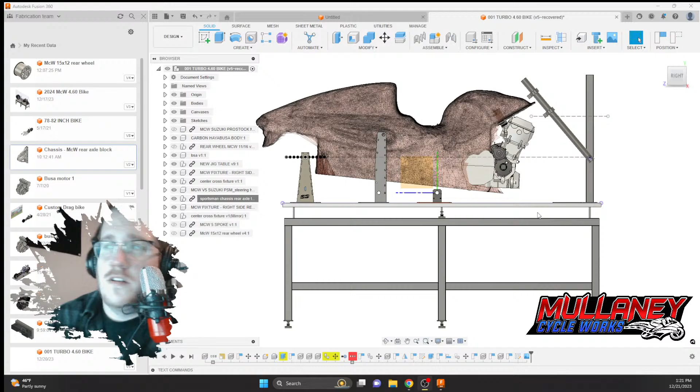All right, so this is just our base setup. Right now what you guys see is the 3D scanned body I have here in the shop. I was able to import it into Fusion, and now I can build a bike around it, make sure I have the right widths.

I don't want to make the chassis too wide because then the body simply won't fit. I don't want to have a tube sticking out of the body. I bet a lot of people that see this will think this process is a complete waste of time, but I don't think so, because I'm not cool with wasting material or time.

So let's just get started. We're going to do the back half, that's kind of the only thing I'm worried about right now. We've got a front wheel up in there, a steering neck fixture, my lower center cross member, my rear cross member fixtures, and also my rear axle fixture block.

These reference lines with all the black dots are just axle wheelbase length references. So this one's 70 inches and this one's 80 inches.

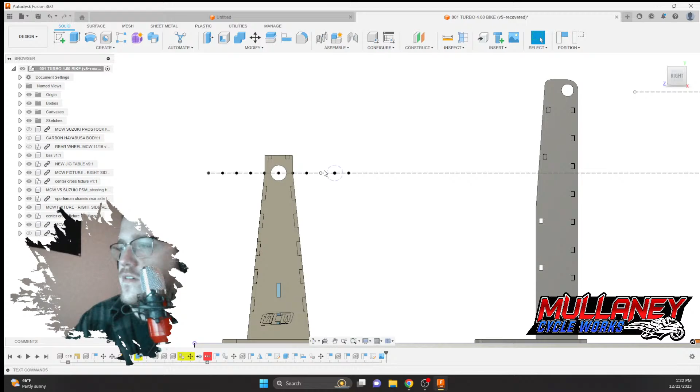So I guess first things first, we've got to think of the width of this chassis. Pro stock chassis is typically 17, 17 and a quarter inches. This chassis, I think I'm going to make it 18 inches, a little wider, just because the option for rear wheels in the 4.60 class is broader.

Some guys like to stretch out the 10.5 inch slick with an 11-inch rim, and I just want to be able to create a package that works with a lot of the products and components that are already out there.

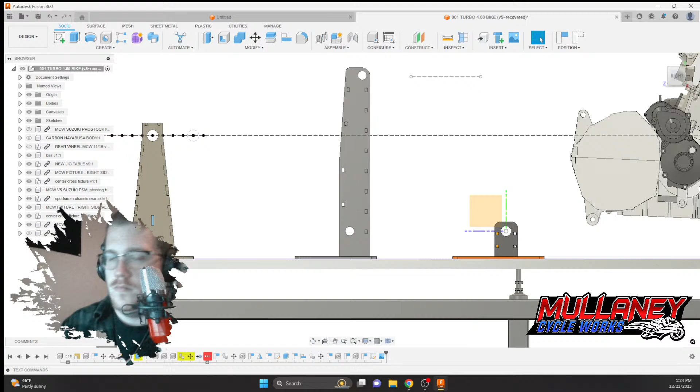All right, sorry, let's build a drag bike. So we're going to build this bike, I believe right now we're going to do a 75-inch bike, just on account of the body works that are available. I think I can squeeze a 75-inch bike underneath this Hayabusa body. Gonna be tight, and even if we have to favor the body back an inch or two, I'm not too worried about that.

We've got a lot of stuff to fit in the front half because this bike's going to be turboed, so we'll worry about that when we get into the front half in future videos here.

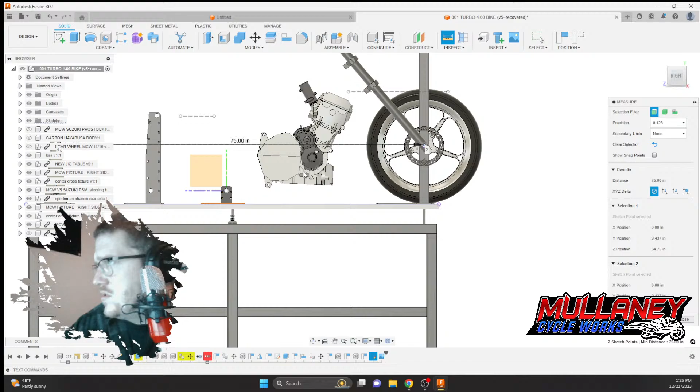So quick little dimension check real quick. So this dot to that dot is 75. Cool, I dig that.

We're going to use that spot because the axle blocks I plan on using, I was going to do some steel fixed axle blocks, but I've decided I'm going to make these nice aluminum axle blocks in case we want to stretch the bike out in the future. We can make new axle blocks and just stretch it out 2, 3, 4 inches or so.

So first things first, start sketch, capture position. Right here, this is our lower main center tube. It's going to be 1.125.

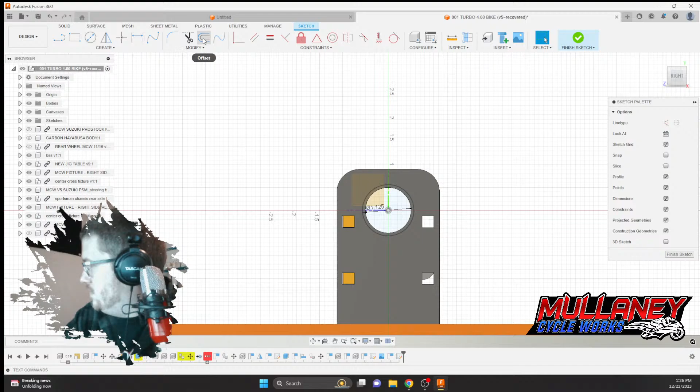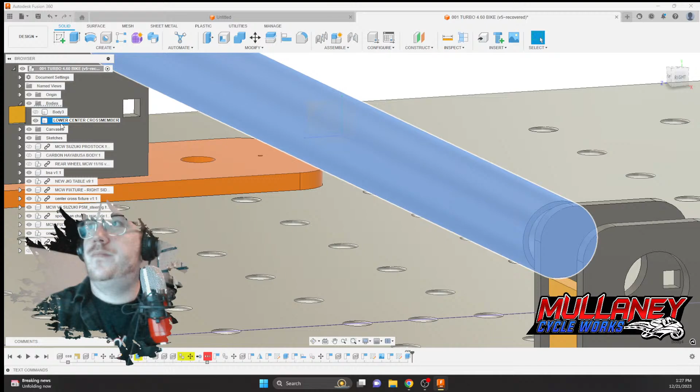Lower center cross member. And then we're going to do an offset plane from this edge right here, and we're going to do some math real quick.

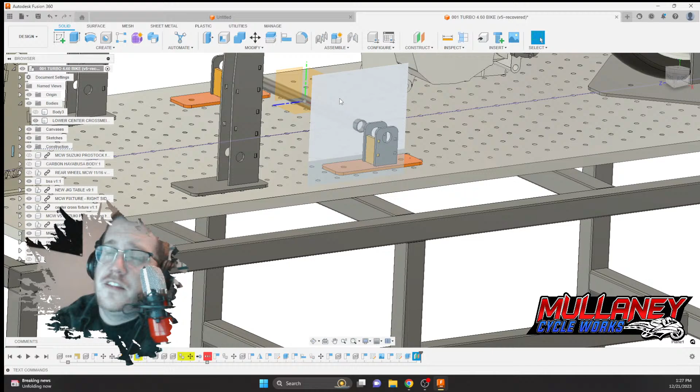1.125 divided by 2 is 0.5625, plus 0.065. So we'll move this in right there. So what this plane is right here, that's a construction plane. Now I could click on that surface and actually use it to sketch on. This is representing the center of the 1-1/8 inch tube that would be on the outside of the chassis, but I also move it in 60 thou or so to have a little bit of room for welding.

One thing I want to do here is import the axle blocks. So we go into our file, into our library here of saved parts. All these parts here I've made and designed and whatnot. Click on here — what's awesome about Fusion, simply click and drag. And you just kind of got to configure where it needs to live.

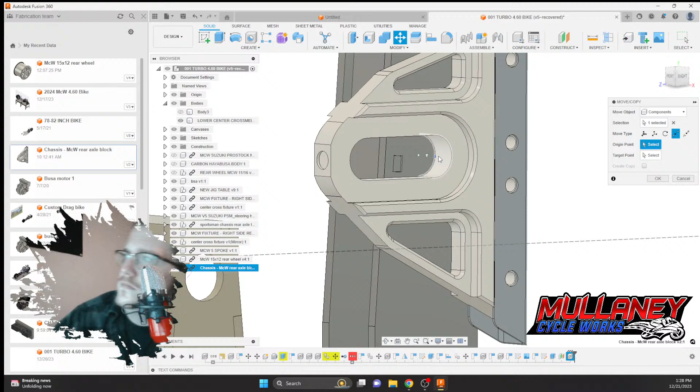I want to skip a step, but I'll just leave this guy floating in space real quick. I just want to make a quick reference mark because it'll allow me to put this where I need it. See that purple circle floating in space right there?

So what I'll be able to do here is modify, change this to components, and then...

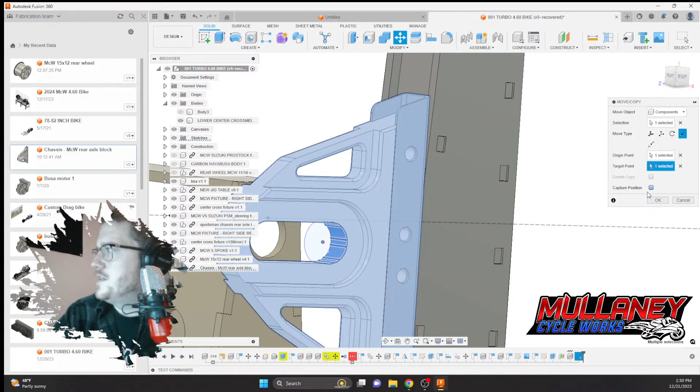I'll pick this point that we just made. Oh, I see what's happening — scoop and split. Control, nope, hold — I want to grab that center. Oh, snap, capture position. That should be right in line with our offset plane that we made before.

So I'll pull that up. And you can see right here, this vertical faint line is dead center with my axle block.

Smells like the old mama's cooking.

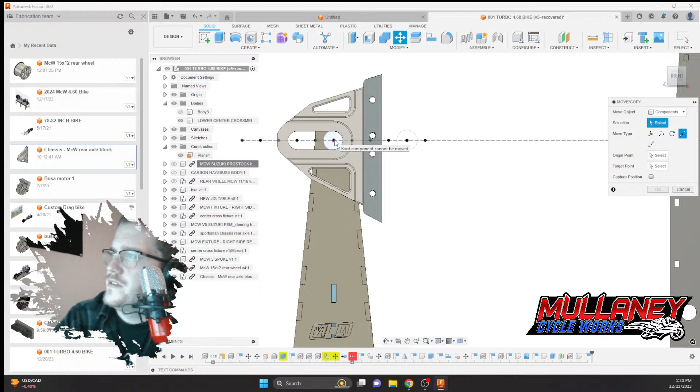So we got that there. So what we'll do is we'll make this piece here in the future. We actually should move it forward an inch because this point right here is 75 inches, so we'll just move her forward an inch.

One thing I'm going to do here is just make a simple — oh, we got simple. Sorry, I think fast and it just comes out of my mouth. Comment that wheel and... boom. Kind of big, kind of large in charge.

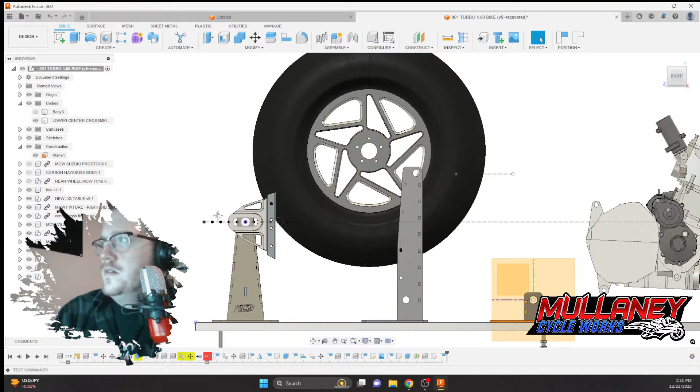We might have to raise up our axle because this tire is going to be a little taller than a Pro Stock tire, but we'll see. Not too worried about the tire.

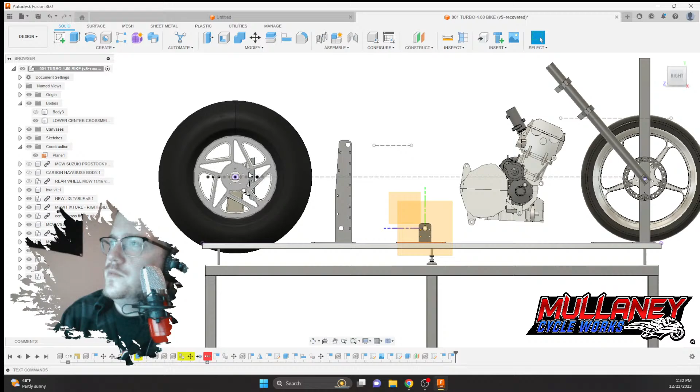Actually, you know what? We'll go ahead and just raise everything up an inch and I'll put spacers underneath my rear jig, so we'll do a control there, control here, and control. You want to just move it up 1 inch.

Looks a little better. It'll still give us our chassis to have some rake to it.

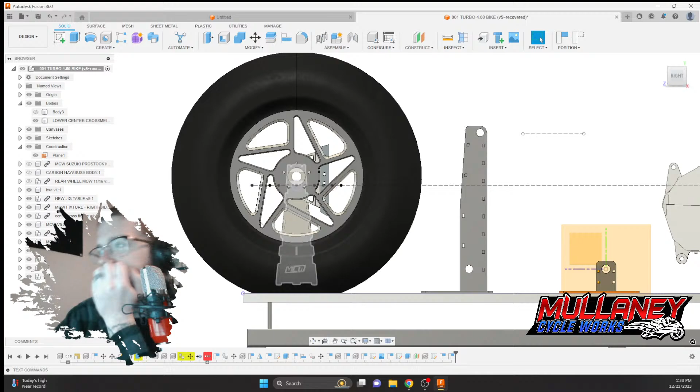All right, let's take the wheel off. And just don't mind that gap that's down there. I'll put some aluminum spacers underneath of it — 1 inch spacers ain't nothing.

Again, CAD is just for me for references. So it's nice I could bring my laptop out into the shop and do a little click, and I know how wide the tube needs to be, or how long it needs to be, I should say.

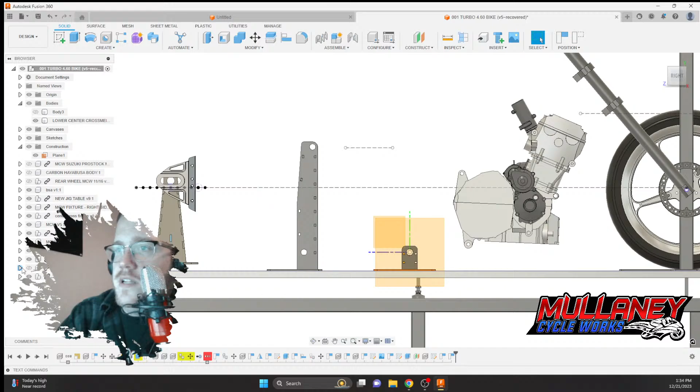All right, let's start laying some tubes. I guess I do need the rear tire up in there to get an idea. We might move these two back just a little bit.

So there, and control, we want to do this one. Let's just probably move this back 2 inches. Yeah, let's try 4. The reason why I'm going in 2 is because the bolt pattern on my jig table might be a little close for regulations. We'll just do 2.

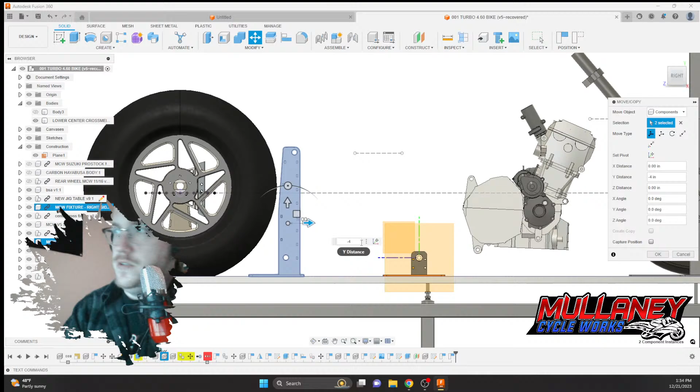Figuring it out just with you guys, so bear with me. I think what we're gonna do is move these center up forward closer to the motor. Let's see what kind of wheel... do that.

Make another quick reference. So we'll do a P for project.

Here we can probably get 52 or so from rear axle to the center of the crank. Be solid, I could deal with that. So that means we'll just move our center cross member forward, just so we're not so - the space that's right here is just dead space. So we'll just move this point forward 2 inches, and our engine brackets won't have to be so big and obnoxious.

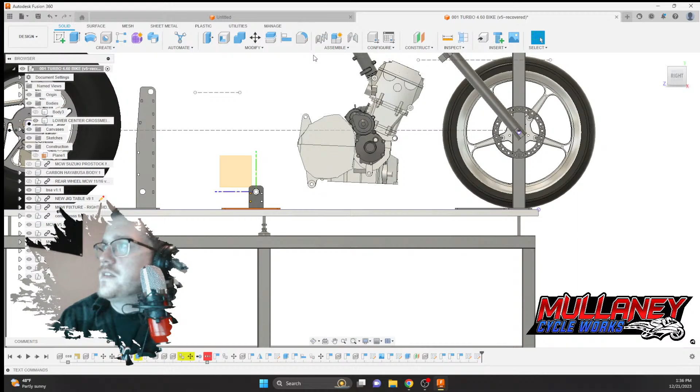So we'll do a finished sketch, and then move here, there. Let's do this in 2 steps.

Which is fine, I'm not too worried about it. Kind of the nice thing about Fusion is that, honestly, at the end of the day, everything is not set in stone.

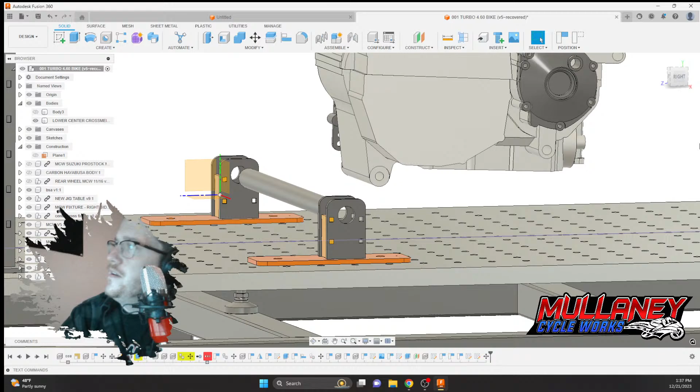And we're going to do -4, and all that will line up again. So we'll still have our reference, even though we move that stuff, our reference is still there. Our offset plane will still be in line with where I need it.

What's up, Mr. Langley?

I'm happy with that, so let's start making some tubes. Well, I'm not happy with that, but I'll center my rear wheel up here in a second.

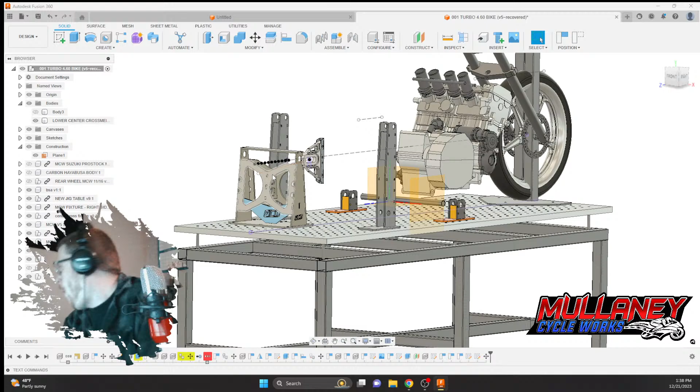That 6 sketch came from - we're just gonna delete it, don't really need it. All right, so I guess at the end of the day, right now, we need to start connecting dots, so we'll grab our...

I do want to make 3 more cross members really quick, and now we'll just do the 2 rear ones first, and then...

So we're gonna pick this point. Pick this point. Oh, not that point, it's just a circle, not the entire thing. So this will be a 1.125.

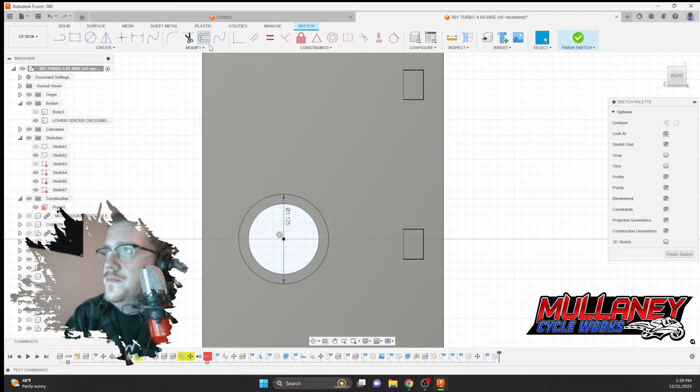All my tubes are typically 058, kind of a spec with NHRA. And the 2 center cross members, I beef up the ones that kind of hang the motor, you know, a lot of shock when these bikes are, you know, drop the clutch at 6,000 RPM from 0 to 100 real quick, you know.

So we got 2 cross members there, and we'll just extend these boys 18 inches, that's what the width of our chassis is going to be. So there we go guys, we have 3 tubes, we're getting there.

And you'll see what I'm going to do here shortly with mirroring. I only focus on one side since, like I said before...

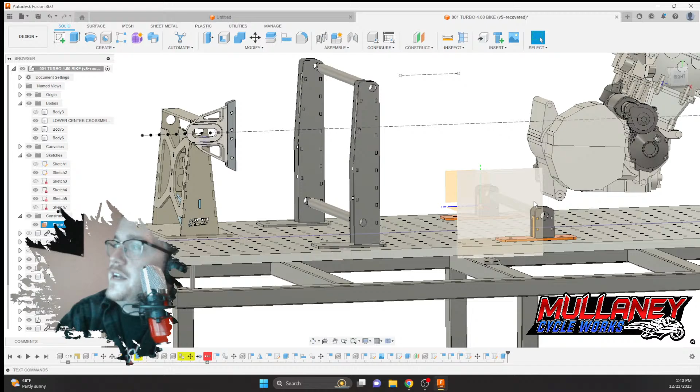Mr. Lang, is the sound better today on YouTube? I think it is. Trying to talk more into the microphone instead of away from it and moving all around.

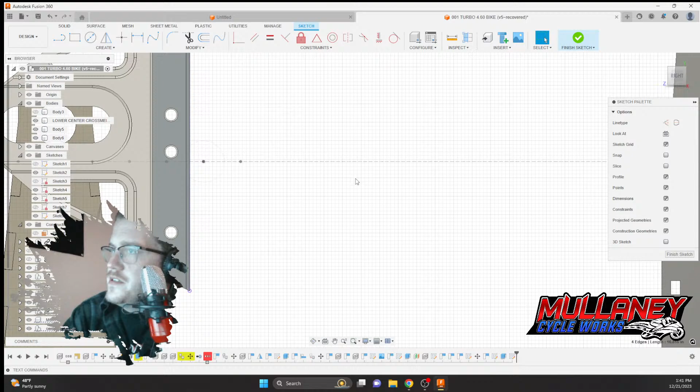All right, so I clicked on that right side plane. I'm just grabbing a couple of references so I have something to click to.

So we're literally connecting here to here, and then we'll go here, there, and there, there. We might do this one in the two, and that there is our raw shape of the side.

So I know my bending radius and my tubing bender I have is 4.5 inches. And then we need another, might go a little higher with that one and define this number. Do 6, yep, like that.

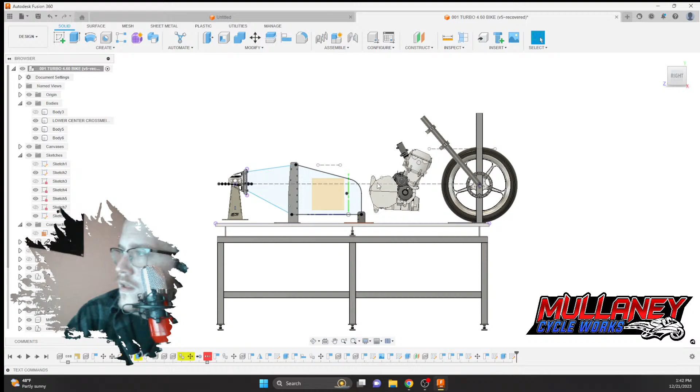Oh, one thing I want to insert into this so we can have some more references. Right now I'm kind of drawing from ideas in my head, but sometimes what I like to do is insert a canvas, and I have my good old buddy Jimmy Montaigne's like perfect picture.

I'll click here, click there, and I literally - 64, so we'll change that to 75. It scales it, and then we'll just put this into place, and I'll have a - this isn't the same body work I'll be using, but it gives us a pretty solid reference to another bike.

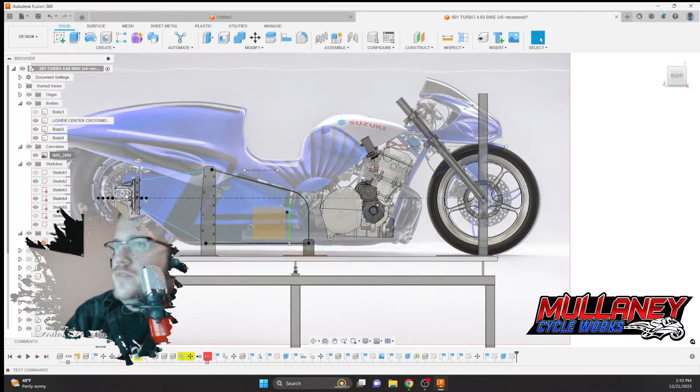Now my tubes and stuff are going to be way different, but it just gives us an idea where the body work might lay, and looks like this steering neck's actually pretty low, and just differences. So pretty cool, and I could change the opacity on that too, so it's not as...

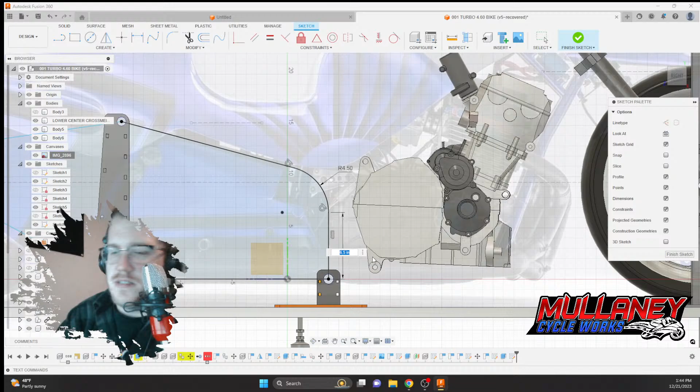I'm actually going to go higher with that number on that side tube, probably bring that up to 7 inches. We're looking good.

All right, one more tube I want to put in here is more of like a mock-up, like a swing arm style tube. This will go the top of that. Some vertical supports...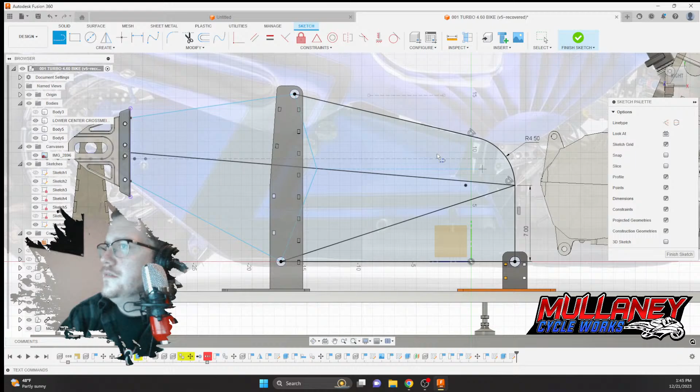And who knows, maybe being that this bike's so long, I could put a nice diagonal tube here, maybe another diagonal tube here or something. I don't know, we'll see. Maybe I'll even - I like it, let's do it.

Let's define some measurements so they won't move around on me in the future. 0.875 work, cool, nice round number. 0.875, how's that look? Yeah.

All right, so that is literally the base shape to the rear half. Now we need to add a few more construction references and places where we can add some sketches.

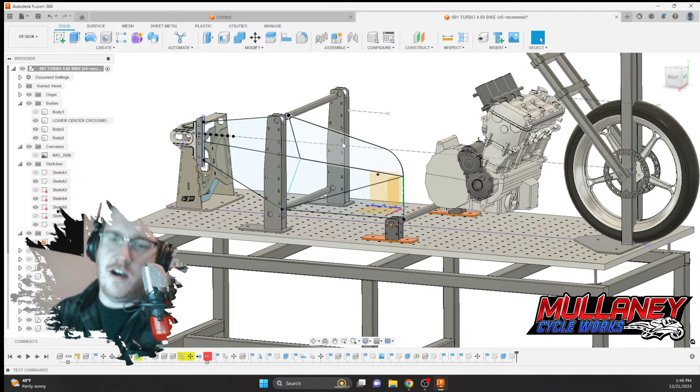Sorry, really thirsty today for some reason. I think I've been drinking a little too much coffee, and it's messing with my system.

So simple as this, we're going to construct up here - plane along path, real simple, real easy to use. So boom, there, boom, and as long as it's on the path that we want to work with, I don't care where it is.

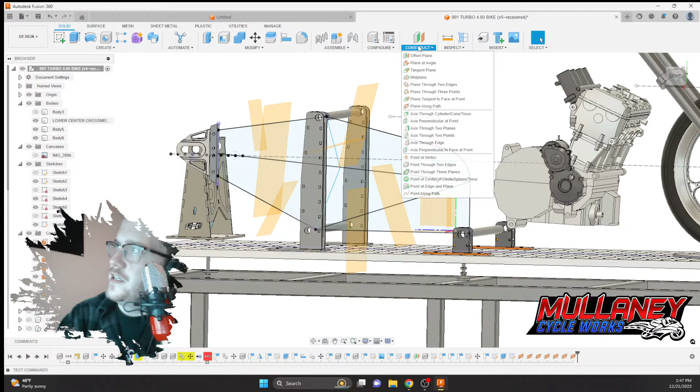Boom, that's that right there. Oh, I got two more to do. And this one, I'm actually going to do it twice, even though I probably don't need to.

All right, let's start laying them. So, here to here is... and what's nice is you always have a center point of where that line is. So even when the camera views 90 degrees to the part, and you have a whole bunch of parts and stuff in the way, you can just click the black dot, and that's the center point we want to work with.

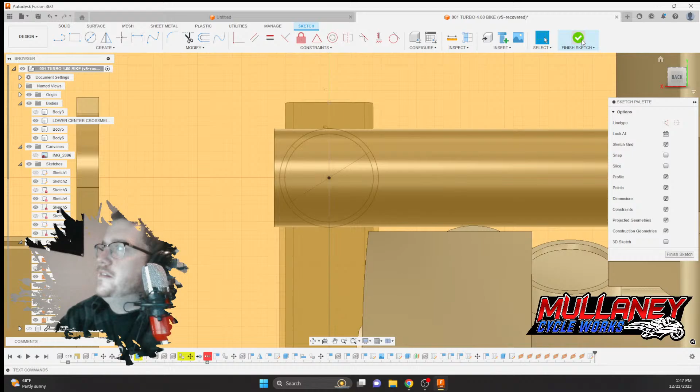Again, 1 1/8, because that's pretty much what this chassis is going to be. 1 1/8 tubing, 058, and then finish sketch. I'm just going to go ahead and do that process to all these sketches real quick, all these planes. And again, see this black dot? We click on that, and that's where we need to work. So, oh, not that black dot, this one.

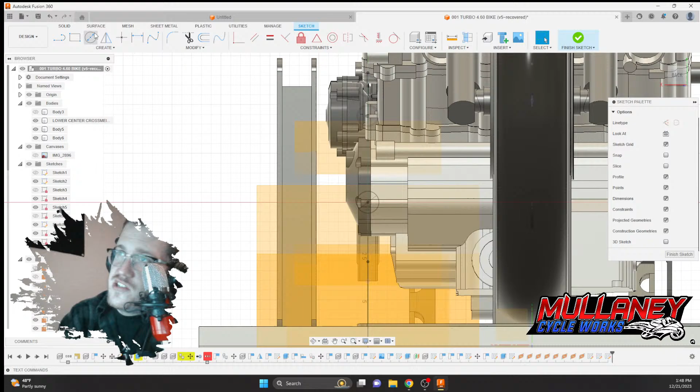I don't know if you guys are catching the drift of what I'm doing here, but I'm simply giving references of the tubes and where I need those tubes to be, and what size. For what I'm doing right now, I don't need it to be a circle. If I wanted to make an I-beam and have it follow where I want it to go, this is the same process.

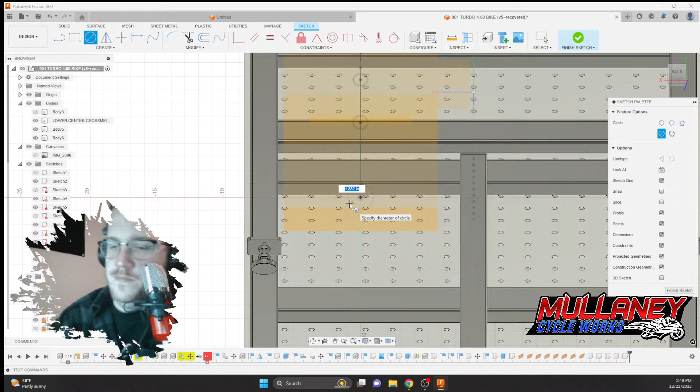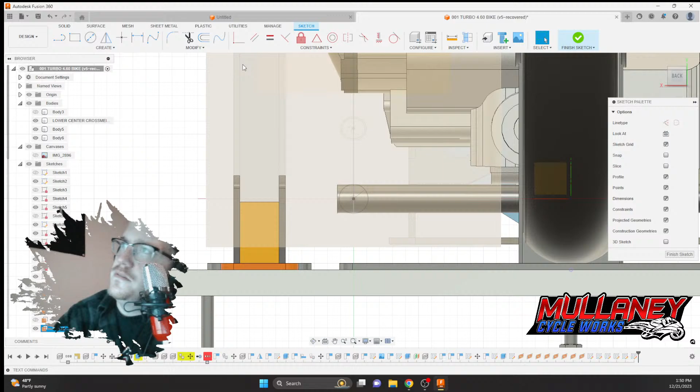So, a little about the 460. For those that see this video and aren't familiar with what a 460 motorcycle is, it's a pro category in some of the sportsman sanctions. I think it's a pro category, pretty sure it's a pro category. It's 8th mile racing, and these bikes cannot go faster than 4.60 seconds in the 8th mile. The closest you can get to the 4.60 is better. Obviously the goal is you want to be dead on, like dead on.

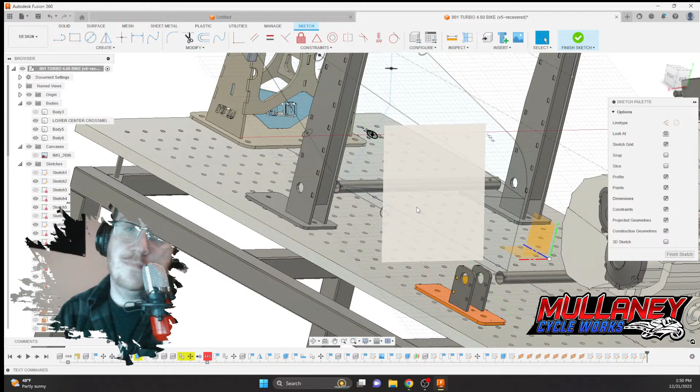And that's how you win 4.60. Really competitive class. At a lot of these races you'll see 30, 40, 50 bikes even sometimes. And a lot of those bikes are just old dinosaurs, still good bikes, they're just old. So what I want to do is help update some things and try to get some new bikes out there, and just help the motorcycle drag racing sport grow.

So I got all those, pretty much all of those planes to go away. They just kind of go away once you press finish sketch. You could always pull them back up. All these construction planes here to the left, right above me, you kind of actually can't see them. So click on this and the plane shows back up, and you can click on it again.

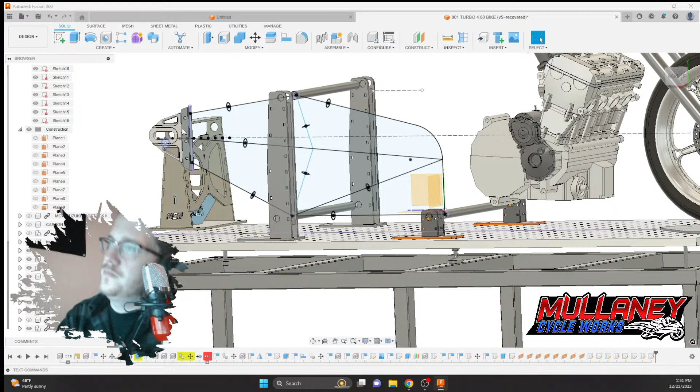So the simple process is this: we do extrude, and we're going to do not one side, we're going to do two sides, and then distance to object, and then literally click on this face, and then rotate a little bit, and then the same thing for the second side, and boom. We're not going to do a join because I want to keep all of this separate. And there's our first tube we're going to lay out with our process.

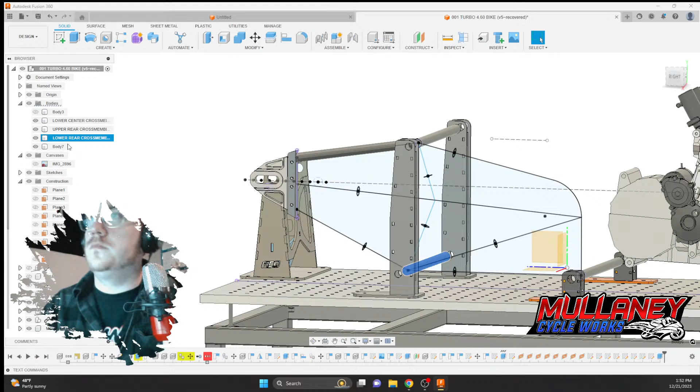So like I said before, I'm going to do my best with labeling all of these. And we're already at 37 minutes. Upper rear cross member. Lower rear cross. Upper right. Really hard to... probably a shorter word I can call that, but I'm just gonna try to keep it all

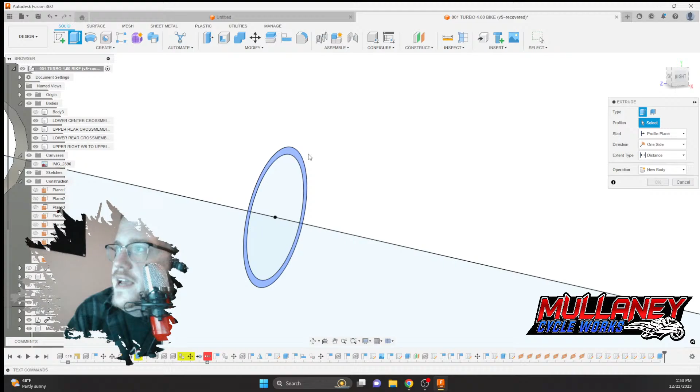going. So what I'm gonna do with this one is gonna be a little different. We're just gonna do a sweep. We're gonna do this profile here, we're gonna do path. And it defaults to red, the cut, but we're gonna do a new body. And we're also gonna click this one because that's where the tube's gonna end at. So there's our second tube.

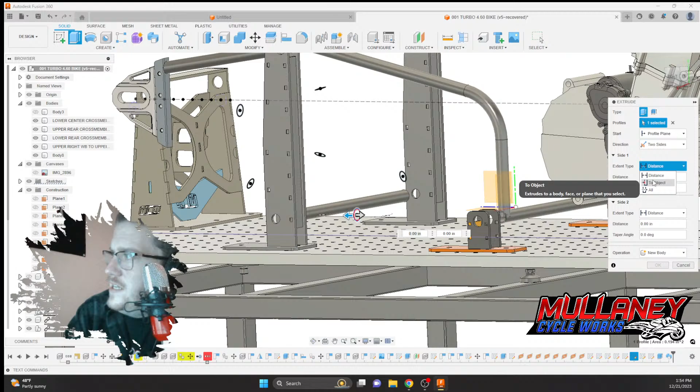And just kind of continue this process of connecting the dots, all of it again, two sides. Click that. But whenever it turns red, you have to change it to a new body, because if it's red, it wants to cut material away. And there.

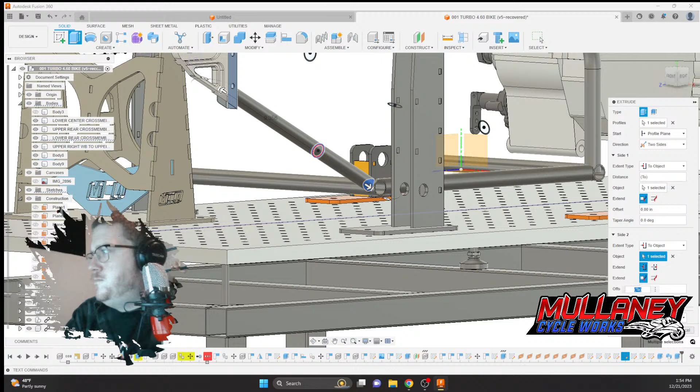And it also wants to default to join, so I don't want that to happen either.

Mr. Langley, how's that GS bike going, man? You still working on that bad boy?

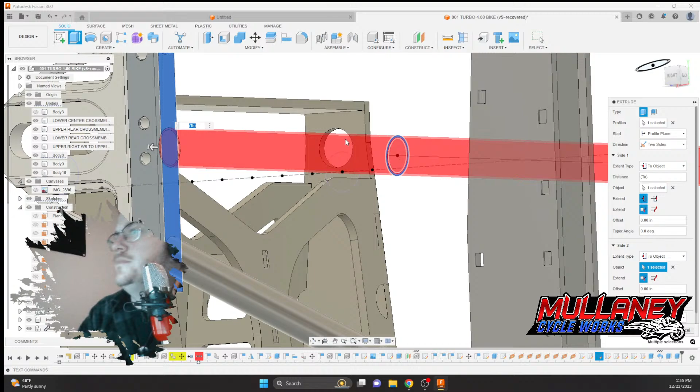Oh, we got a new subscriber, my boy TJ Golden. Miss you, buddy, if you ever watch this, I miss you. Haven't seen you in a few years, dude.

Oh, we're getting there, guys. Got a lot of tubes coming in, starting to take some shape, and I don't want to get ahead of myself, so I'm gonna go ahead and label these.

We'll call this one right side, lower center cross to upper rear cross. Swing arm tube, I call it a swing arm. Obviously we don't have swing arms on these bikes, but it's in the area where a swing arm would be on a normal drag bike. So this would be axle block to lower rear cross. The lower center cross to rear cross.

Dog, let me know what you need, I'll help you out.

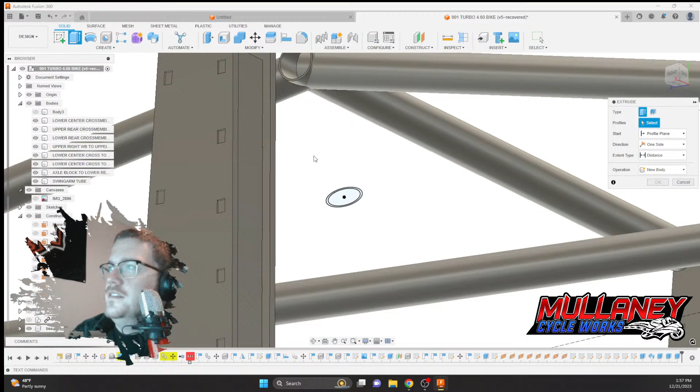Soon I want to start having live capabilities of doing an online chat. I don't know, I don't see a million people coming and hanging out, but maybe a couple drag bike guys, like a hangout spot, have me doing this in the background, but then have a chat room of 4, 5, 6, 10 individuals having a good old time just talking drag racing and the future of drag racing.

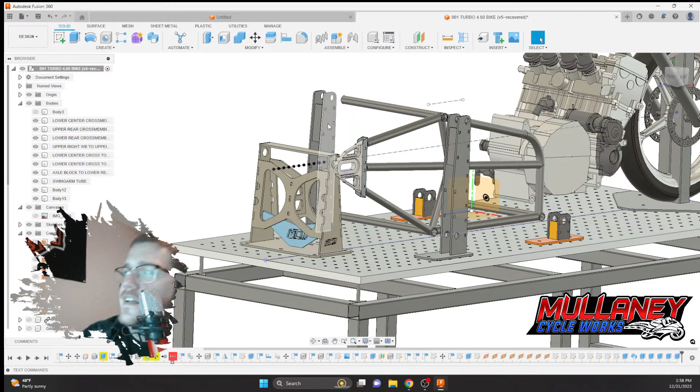So boom, there's our... you want to beat her, huh? You want to beat her. All right, so there we go. There's the basic shape. I'm gonna do something about the wheelie bar mounts. I may extend this, thinking I might extend it up maybe 2 inches or so and have the top mount come that way, up off this piece right here. And then I'll have a lower mount stick out down here. I want to keep this area open for the brake system and whatnot.

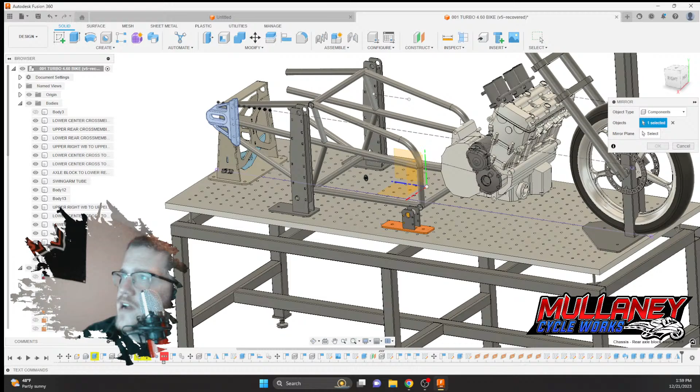So then we'll do create mirror, and we'll do all these tubes here. Oh, plane. And then we're going to do that again because you can't do components and bodies at the same time - at least I don't know how to. We'll do components and grab this rear axle block and do the same exact process.

And then we'll go ahead and center, make a little cross member tube. What I'll do is project and grab this tube. Only thing I need to do here is make a quick little center reference line, because if you're not perfectly center, I've learned, man, it could just ruin your day. You know, if you go to... the tube's just not there. Make sure these two are parallel.

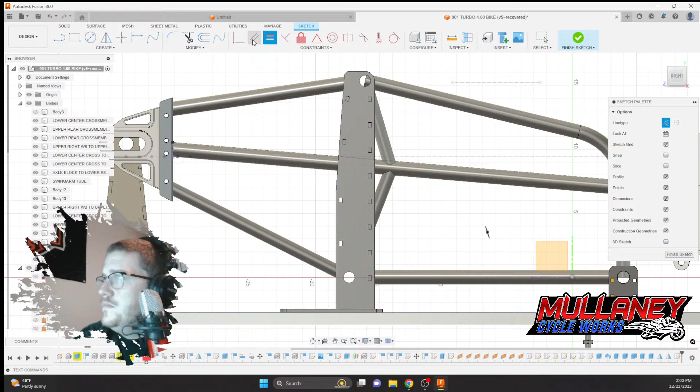What I want to do here is just do one more tube, cross member tube. And this one I'll probably do 058 here again. Two sides, up to object 1, and then up to object 2, new body.

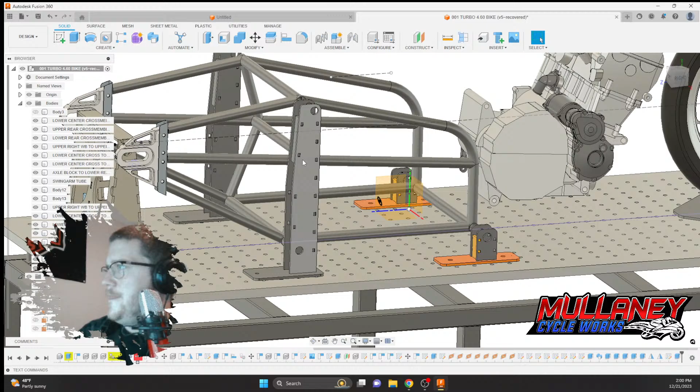Turn off some of these sketches because it does get a little confusing over time. Yeah, there's a back half.

Probably go ahead and put a cross member tube. We'll do one more cross member tube. And we'll go back to that one sketch, and then I'm gonna turn one sketch back on. Nope, not that one.

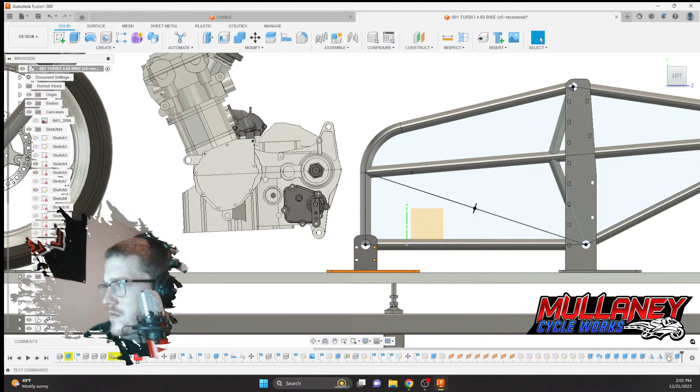Because what I want to do is use the sketch as a reference, and then pick up a point. And then this one's gonna be, I guess we'll just do it there. We'll be good right there. 1.125, and this one's gonna be 065, 065. Same process - kind of repetitive, but that's kind of the name of the game with this Fusion stuff.

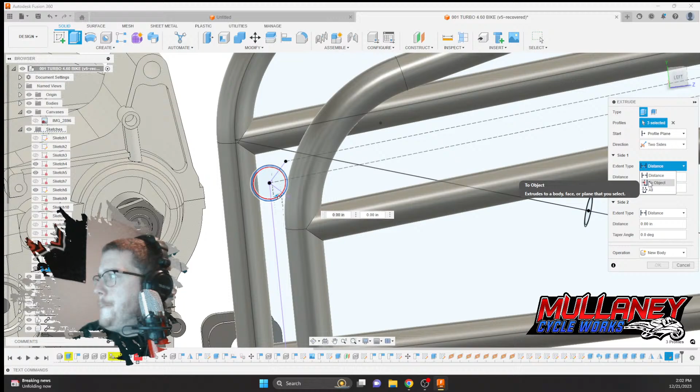Trying to shed some pounds, Mr. Lee, huh?

Well, guys, there you go. There is the simple point of the back half. I will have a tube up in this area. Just kind of got to figure out what I want to do and how I want to attack that. I could probably, we'll just do it real quick.

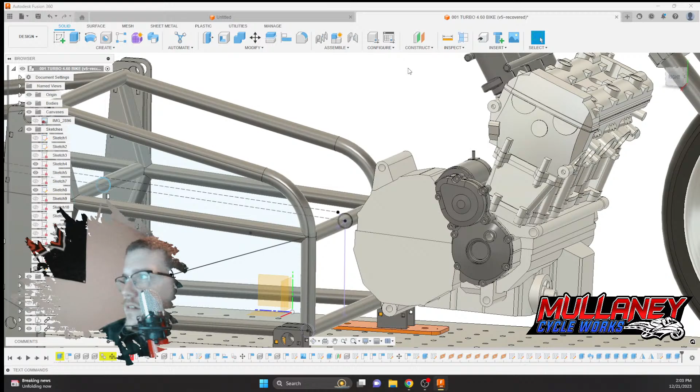Let's do it. So we'll pull up a sketch again, and I want to make a plane off the center of this, right? So we'll do construction, plane at angle. Right now it's vertical, and it's a simple 90 degrees to lay it back down. Click this one. So now what we can do is...

Project - I want that line as a reference. And then center. And I got, Fusion's all about references. All right, so what we're going to do here is just go point, point. That.

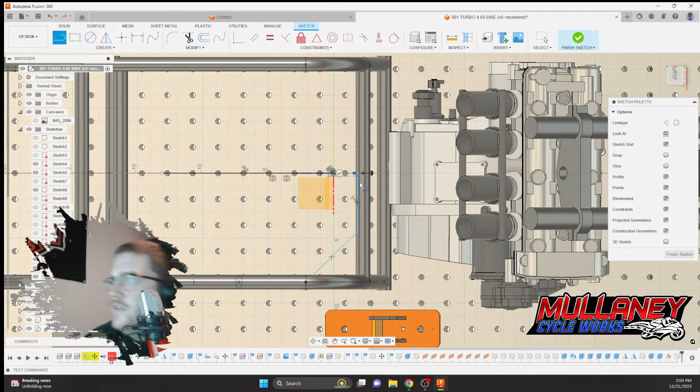I don't know, just tinkering around right here. Nothing too crazy, but just trying to see what something looks like.

And then we got to change these points to 4.5 because that's my bend. And then... yeah, I really don't know if that's going to be our ticket right there, but we'll try. We'll see.

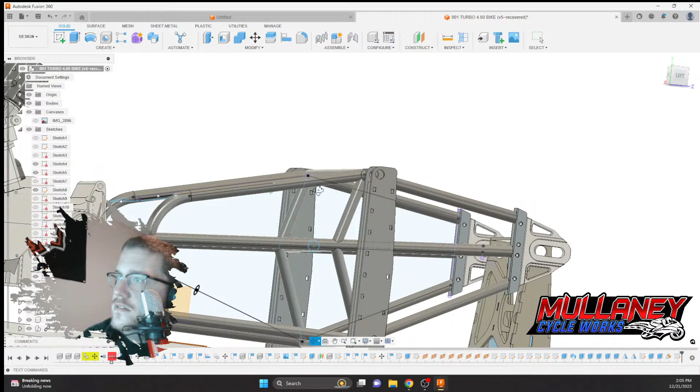The biggest thing is I'm trying to keep the seat height low, because on some of these bikes it's only like, shoot, 18-inch seat height, I think it is, which is pretty cool, real low. Sucks for a tall guy, I would have to admit. But...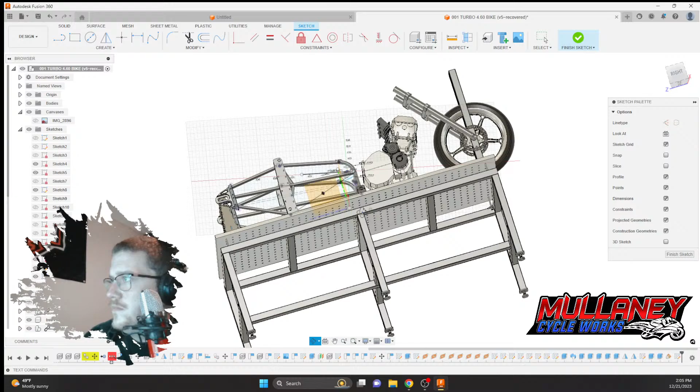Glitching on me a little bit right now. I need to work on that last sketch we just did. What I want to do is boom, boom, this one. What we'll do is Control T. Oh, we'll just move it back until it looks good.

Then again, construction plane on sketch. Realistically, I could do that one simpler with the sketch. Center, C for circle, P for project because I want to grab that point. C for circle, I'll probably just do this one out of one. We'll do it all the same.

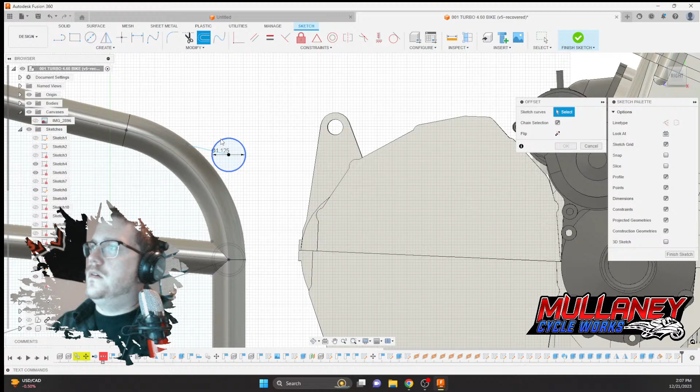And then we're going to do a sweep. So see what happened here, my center circle was not on the correct plane. No biggie, I'll come back here, redefine sketch plane, and just click on the right one, and it clicks right to where we need it to be.

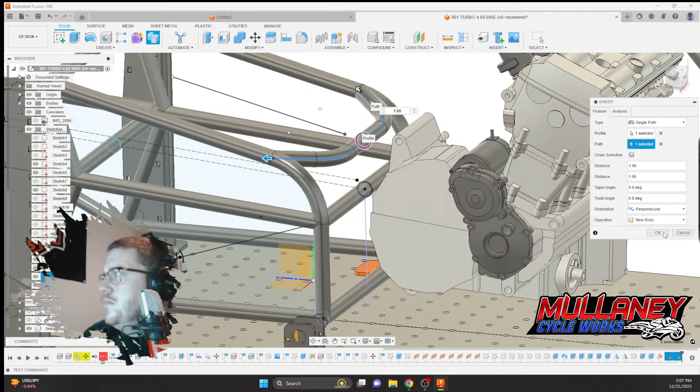Yeah, I don't know, we'll see. I think I might have to give that a little bit more angle to play with, and change should work in there, no problem. But I might have to give that a little bit more angle in this area. So, we have a coincident here, I think. What is it called? Ew, that's some stuff up.

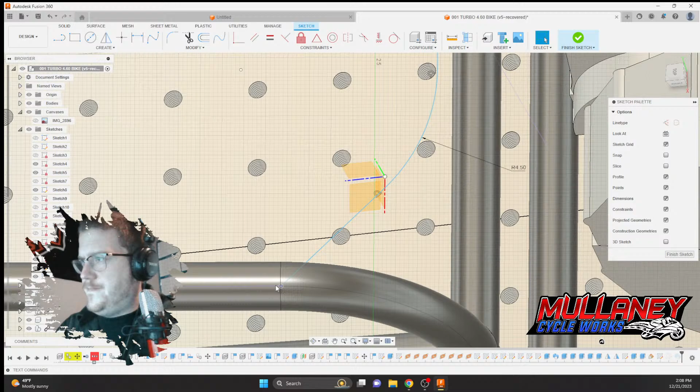Now, if you want to keep it on this line and keep it coincident with that, you can. What we're going to do is something simple, just delete this, this, and this. And pull this back just a little bit. And mirror it again.

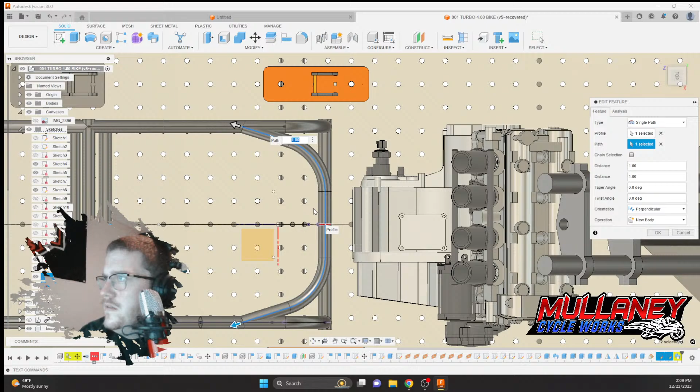But all right, well, that's the start of a back half and the new 4.60 bike. It's going to be 74 to 76 inch wheelbase, Hayabusa body. Let's see, kind of get an idea here, an idea. Tubes are sticking out of the body, but I'm not too worried about that because the Busa body is pretty wide, and we're going to have some nice carbon fiber side panels. But that's not looking too shabby. Dig it, dig it.

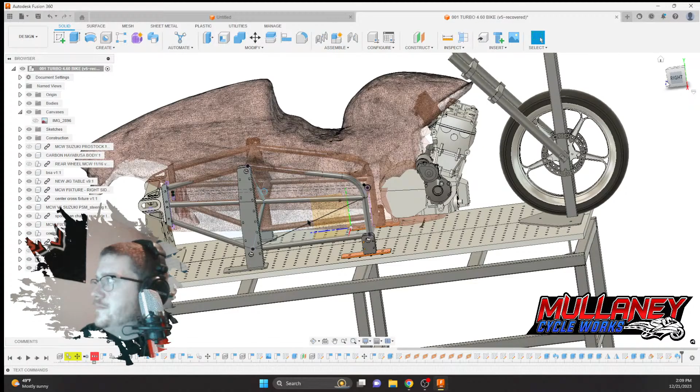We'll see, well, I might change up that one last two we were working on, but this is kind of the name of the game. I started this project already and then realized that the wheel that the customer wanted to supply was just a little too wide for the pro stock width, and that's kind of a bummer. Kind of wastes a lot of time.

But hey, that's learning. And this is going to be the conclusion of what we got going on here. Like I said, I just wanted to do a back half for you guys. Maybe we can, I'll do this tube real quick. Not done. Two sides, to object.

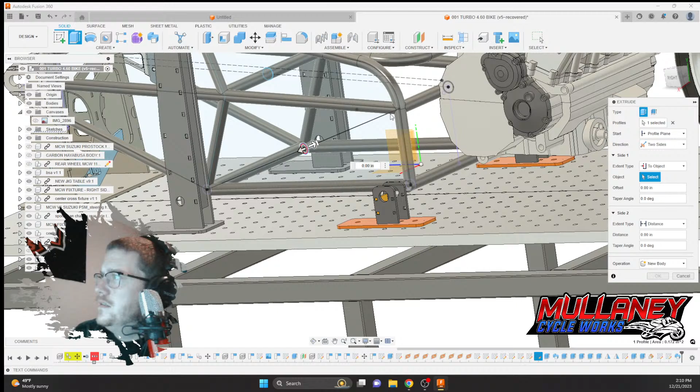And I can go back and actually go back and edit the mirror feature and add this tube to it. Should one, two.

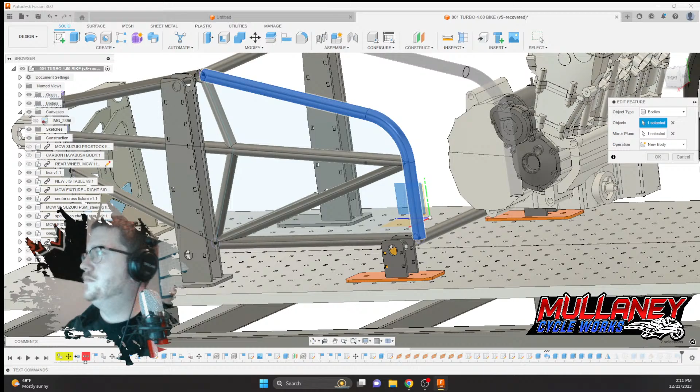Right when you end stuff and you want to add something, then you overload the system. We'll just do another mirror feature. Nothing, there's just a couple clicks. Bodies, click here, click there. Boom.

Pretty cool, like I said, there's the start. We'll turn this couple sketch off. We'll label this one sketch, right side tube layout. We'll turn it off because it's annoying with too many lines. And then we can also turn off the original. Boom.

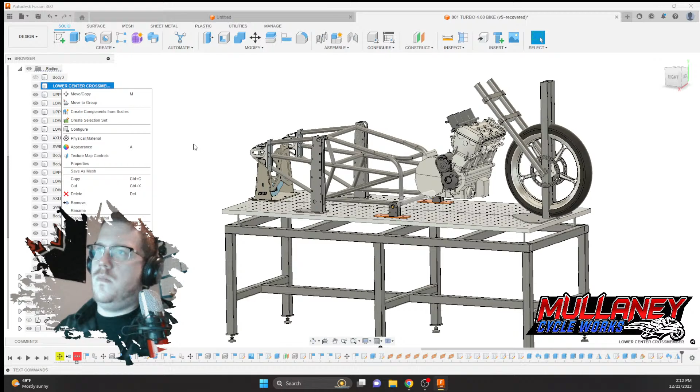One thing I could do really quick to show you guys something, because I can't seem to stop talking. I could select all of these, select, and then click, and then physical material. Should get a box that's gonna pop up. Yep, metal, 41 chromoly 4130, that's what we're working with. So steel.

I bet you I could do this too. So that select and properties. 360 ounces, what's that? Hey Siri, what's 360 ounces in pounds? That's 22.5 pounds for the back section. Pretty cool. Obviously a guesstimate.

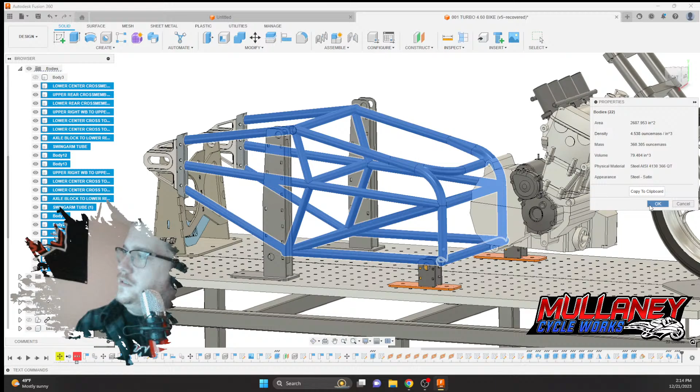CAD world into the real world. But all right, guys.